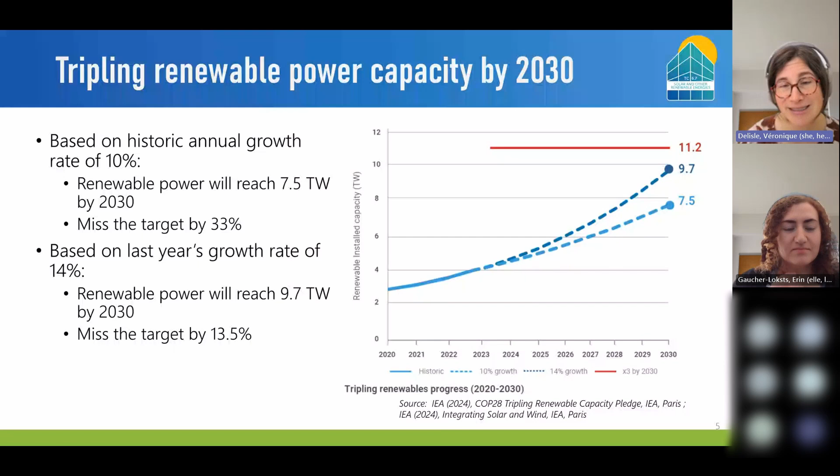Is this possible? Well, if we look at the historical annual growth rate of renewables, and again, that's all renewables, not only solar, not only wind, if we continue with the annual growth rate of 10%, we will reach 7.5 terawatts by 2030. So that's below our target of 11.2 by 33%. If we take last year's growth rate of 14%, we will reach 9.7 terawatts by 2030. So this is still below our target by 13.5%.

So solar is a subset of renewables. If we look at the bottom right graph, what we see here is the evolution of annual renewable energy installations. And what we see there is that in 2023, 75% of all renewable electricity capacity, okay, not energy, but capacity installation was PV, so photovoltaics.

What countries have the most PV systems? If we look on the bottom left, we see the theoretical PV penetration in 2023. So what is that? It's the theoretical percentage of the demand that PV production could provide. So it's energy here. In the European Union, 10% of the demand was theoretically met by PV in 2023. For the United States, it was 6%, and for Canada, 1.4%. If we look at the whole world, we're looking at 8% of the world electricity demand in 2023 that was supplied by PV, theoretically.

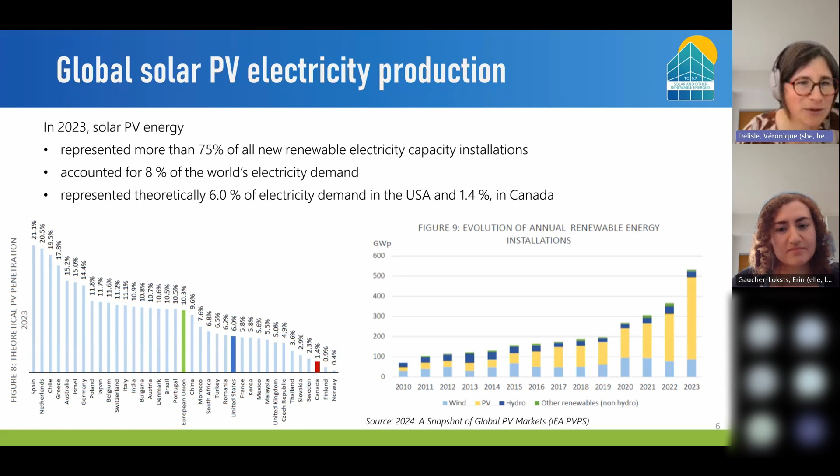What markets are the biggest in terms of solar PV? China was the biggest in 2023 with additional installation of 277 gigawatts. It represented 43% of the whole new installation in terms of capacity in 2023. That was followed by the European Union with 55.8 gigawatts and the USA with 30 gigawatts. And in 2023, the cumulative global solar PV capacity was in the order of 1,624 gigawatts. Also, 29 countries installed at least 1 gigawatt in 2023.

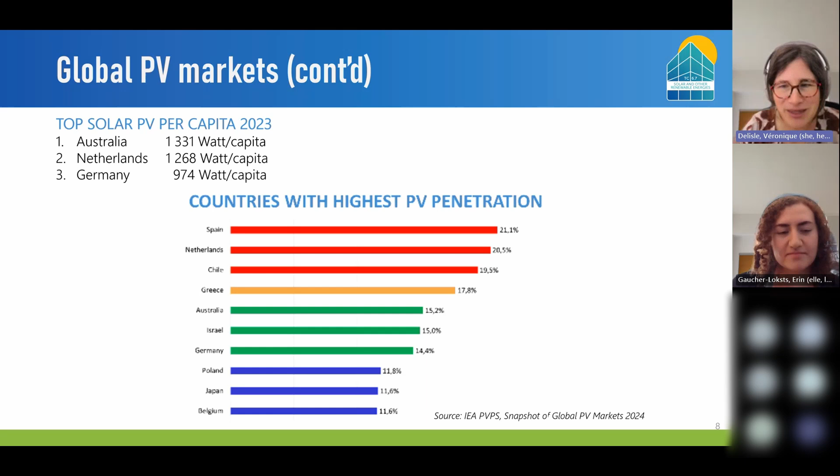If we continue looking at those global markets, what's interesting here is that there are 3 countries that have almost 20% of their demand met by PV: Spain, Netherlands, Chile. Then we have the group at 14 to 17% with Greece, Australia, Israel, and Germany. And then 3 countries in the 12% range, Poland, Japan, and Belgium. So we're going to need more PV. There's no doubt about that.

Where are those PV installations going to happen? So there's different types of PV installations. The one that you might be the most familiar with is ground-mounted PV systems that can be centralized. So centralized is when there is no consumption at the location of generation. So that's often utility scale PV systems. But you can also have ground-mounted systems that are distributed, meaning that there is consumption at the place of production.

So ground mounting is, of course, a large part of the current PV installations. But there are other types, agrivoltaics. So that's when you're combining PV production with agriculture. There are carport installations. There's infrastructure integrated PV. So that's when PV are used on roads, for example. And you will have floating PV as well. Floating PV is when PV modules are installed on a floating structure on reservoirs of hydro dams or water treatment plants. And then you have the building types of installations where you will find building applied systems.

So that's when modules are added to the buildings, applied to the buildings. And then you're going to have integrated systems. So when the BIPV system is fulfilling some of the functions of the building envelope. But we'll go a bit deeper later on what this means. But for now, let's look at the potential on buildings, and more specifically, the potential of rooftops. So the potential that the rooftop of buildings have for hosting PV.

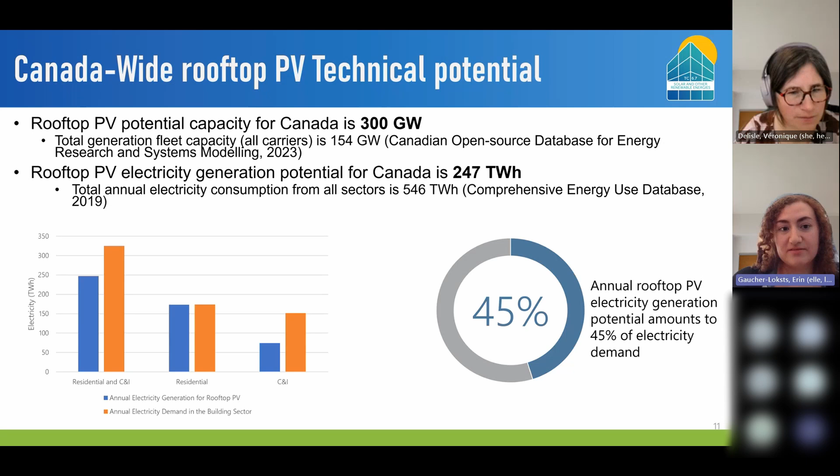And this was based on an analysis we did with 900 different scenarios with inputs of the PV cost, electricity cost, module specifications, maximum market share curves, which is based on payback, and also input parameters for our chosen model, which is the Bass diffusion model for market research and market evolution over time. So the result of that study is a range of annual electricity generation that is between 2 and 27% of the total electricity demand in Canada for 2050.

So the annual rooftop BAPV and BIPV electricity generation potential amounts to about an average of 6% of the total electricity demand based on the market potential analysis in Canada. And this is very much down from the previous slide, where we saw 45% with the technical potential.

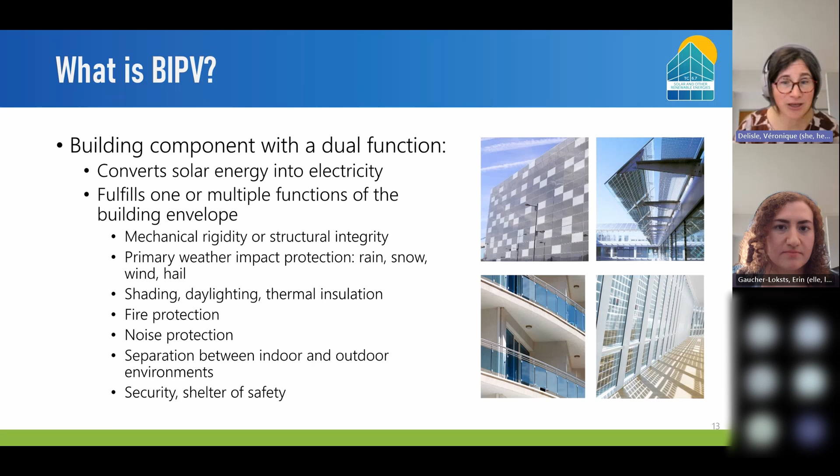So I touched upon it a bit earlier, but what is BIPV? It's when we have a component that not only converts solar energy into electricity, but also fulfills one or multiple functions of the building envelope. And what's a function of the building envelope? Well, it could be mechanical rigidity or structural integrity. It could be primary weather impact protection, shading, daylighting, thermal insulation, fire protection, noise protection. It could be separation between indoor and outdoor environments, like a semi-transparent PV window, security, shelter or safety, like a guardrail, which we see as an example here.

And how does BIPV compare to other types of installations? If we compare with ground-mounted PV systems, what's interesting with BIPV, which is also true for BAPV, is that it does not require surface area beyond that of the building footprint, right? The building already exists or is about to exist, and we're just using the existing surfaces. So that can be seen as interesting.

The other thing is if we compare with BAPV, building applied PV systems, and you will see examples later, it can definitely look nicer than building applied PV, so it can improve the aesthetics of the building. It's also two-in-one. BIPV is electricity production and building envelope function, so it can replace part of the costs associated with the building envelope. If I have PV cells in a window, I don't need a window in addition to that, right? It's two-in-one, so that's also a nice advantage.

And if I compare with traditional building envelope components, of course, a regular window or regular asphalt shingle component does not produce clean and renewable electricity like BIPV will. Of course, you can consume some of the electricity that you're producing, so you can reduce your building electricity costs. It can increase the flexibility of the building with respect to the electric grid, and if it's coupled with batteries, for example, or any kind of storage, it can increase the resilience of the building.

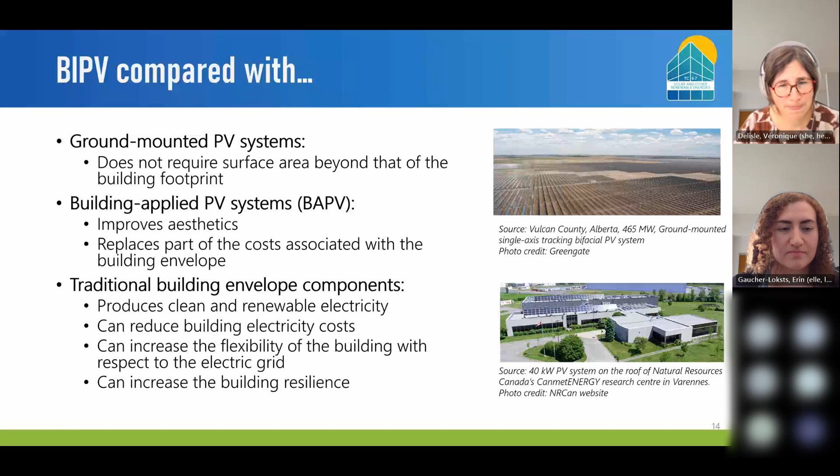If we're looking at cell technologies that we can find in BIPV, it's more or less the same ones that we can find in standard PV modules. Among the most common technologies that you will find is crystalline silicon. You can have monocrystalline, polycrystalline, bifacial. Bifacial is when the two sides of the PV cells are absorbing solar energy and converting it into electricity. Crystalline silicon cells are rigid and opaque, although you can play with the spacing between the cells to achieve different levels of transparency.

Efficiencies of crystalline silicon modules will be up to 22%, and they will be impacted by temperature. As the temperature increases, the efficiency will decrease at a rate of 0.5% per degree C. So it means if I have a 200 watt module at 25 degrees C, if this module is now at 50 degrees C, I will produce 175 watts. The lifespan of modules with crystalline silicon cells can be 25 years and more.

Then you have thin film technologies. Here, what we see is silicon-based, so you can have amorphous silicon technology there. The interesting thing with thin films is you can deposit them on rigid or flexible substrates, so that's giving some possibilities. And you can also play with the thickness of the deposition layer, and with that thickness, you can achieve different levels of transparency. So with crystallines, you will space the cells to have transparency. In the case of thin film, you would just deposit less.

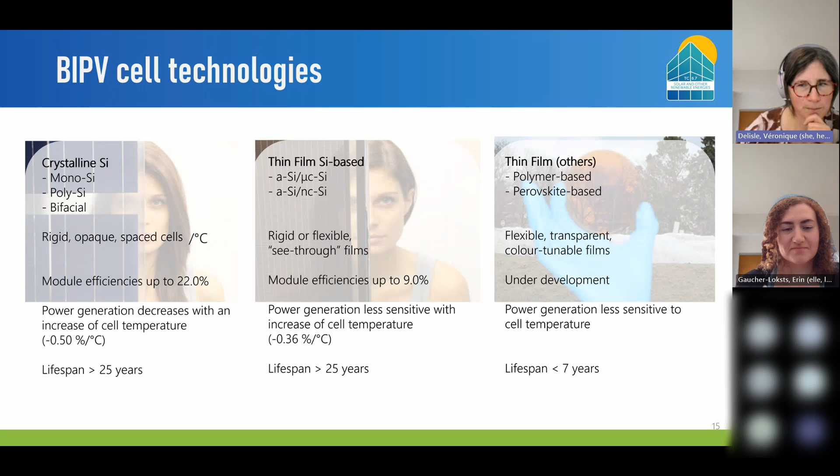Which brings us, yeah. Go for it. Sorry, I was on mute.

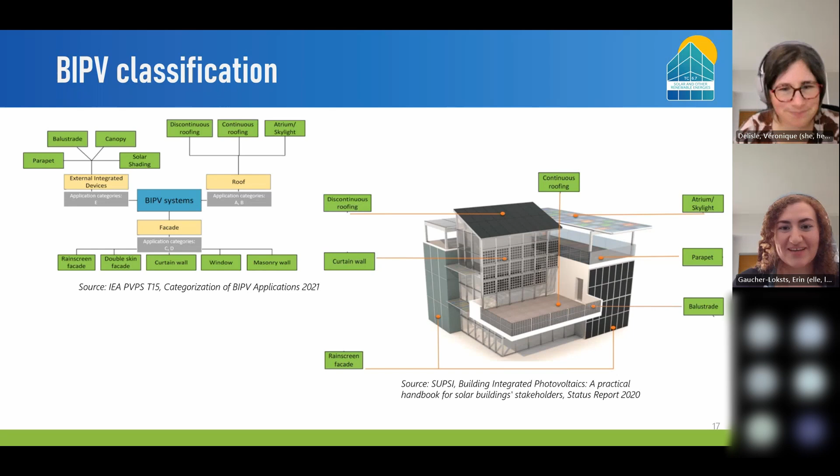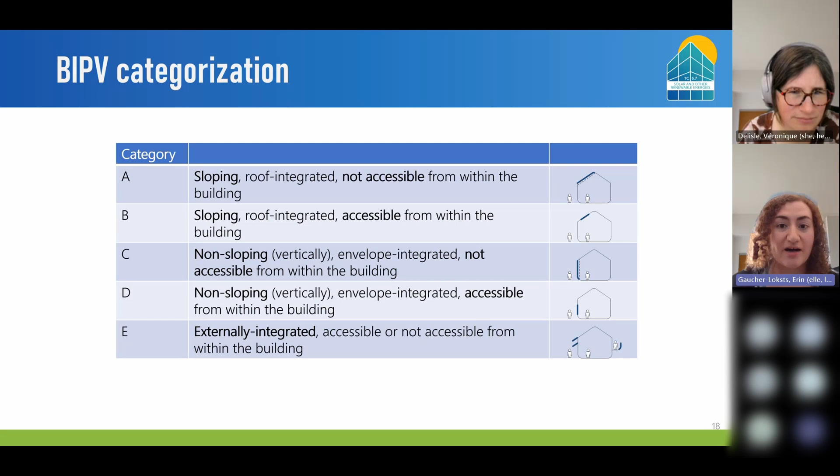So I mentioned that there are three different areas where you can place BIPV, your roof, facade, and externally integrated, but these could be further divided into 5 different categories. Category A and B are for roof applications, with category A inaccessible from the inside, and category B accessible from the inside, so you can touch the module from the inside. Category C and D are facade applications, where category C is inaccessible from the inside. So this could be a rain screen facade that is only outside of your building. And category D is accessible from the inside, so this can be a window that can be touched from inside. Category E is externally integrated systems that can be accessible or not from the inside. This would be solar shading, balconies, or similar applications.

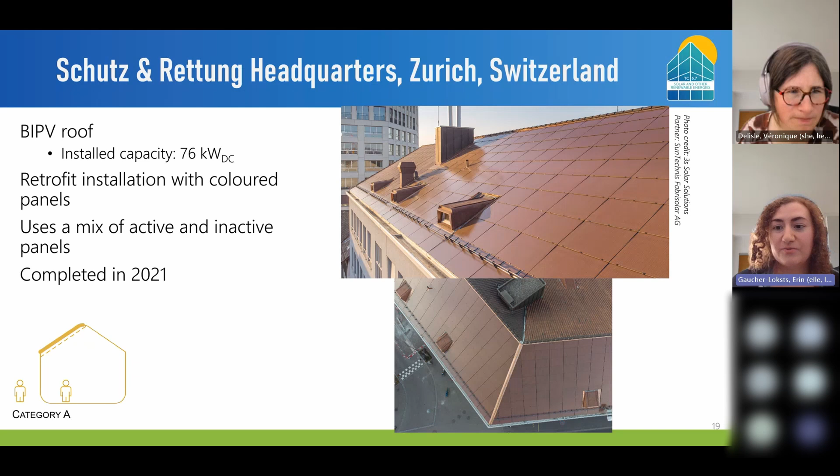Thank you. To give an example of these categories, we have a few case studies to show for each different category. So in category A, for a rooftop installation that is not accessible from the inside, we have a headquarters in Switzerland with an installed capacity of 76 kilowatts. This installation was a retrofit completed in 2021, which used a mix of active and inactive colored panels. And the coloring was custom made for this installation. Next slide.

So this installation is an atrium for a building at the University of Alberta in Canada. It was completed in 2018 with an installed capacity of 10 kilowatts. This used custom-made semi-transparent panels with opaque cells distributed in a unique pattern over the atrium. So they had a different design, and they custom-made those panels so that they can have a unique design across the atrium with semi-transparent cells.

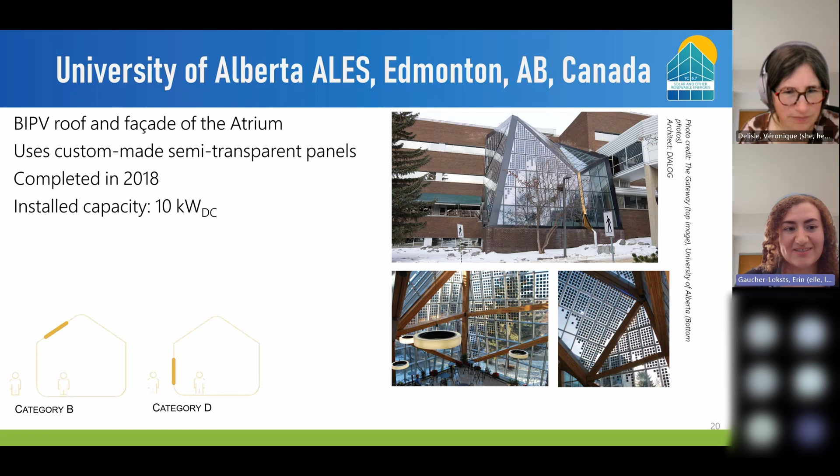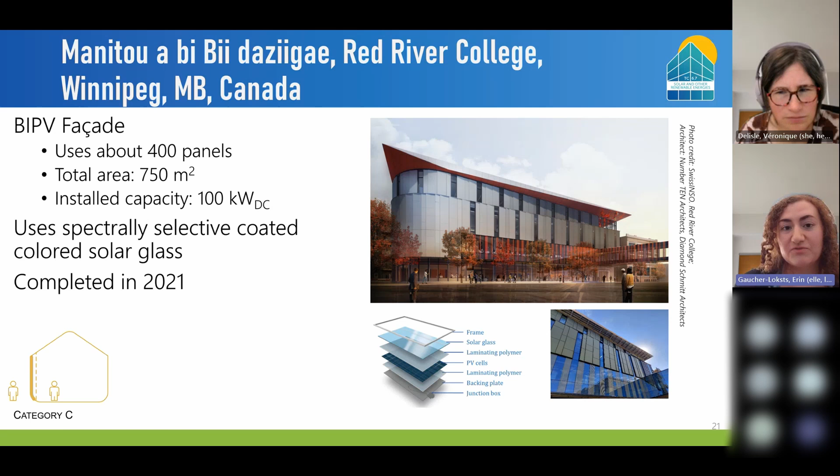Yes. So the next building is for the Red River College in Winnipeg, in Canada. They installed a BIPV facade on one of their buildings. It was constructed in 2021 with an installed capacity of 100 kilowatts. This building used BIPV modules that were a bit more unique, with spectrally selective coated colored solar glass instead of using pigments or dyes, so the color will not fade with the passage of time or due to any sun exposure. Next slide, please.

So this is a recent installation at Saint Mary's University in Halifax, Canada. This is a retrofit installation with an opaque facade as well as semi-transparent windows, and it was completed earlier this year in 2024. This is the tallest BIPV installation in Canada, with 22 stories of BIPV. It had a total installed capacity of 100 kilowatts. Next slide, please.

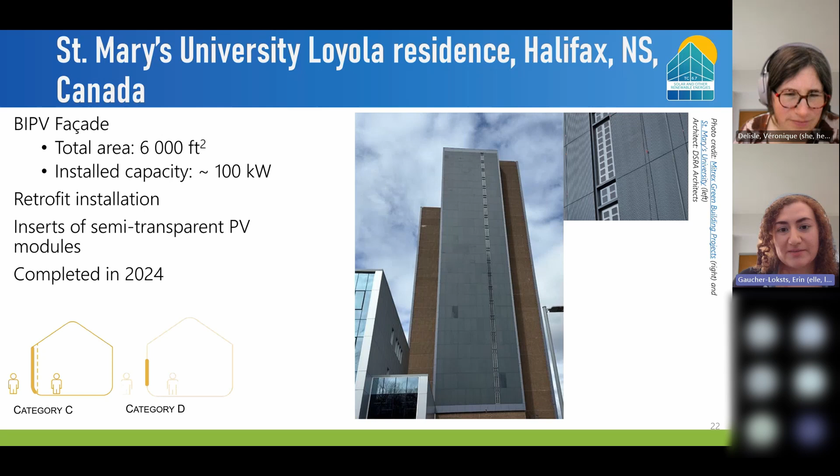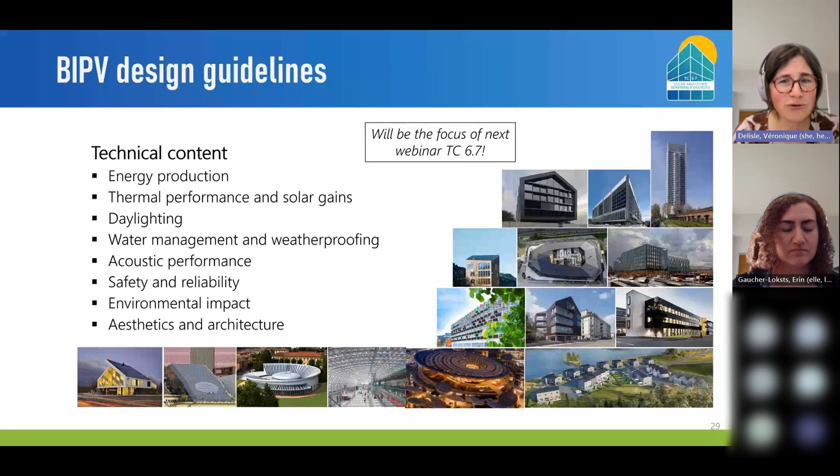And this guideline contains information on what to consider when you're designing a BIPV system with respect to energy production, thermal performance and solar gains, daylighting, water management and weatherproofing, acoustic performance, safety and reliability, environmental impact, aesthetics and architecture. And you can see there a number of projects all around the world that were used to develop the content for that guideline.

So let me touch now on standards and codes when it comes to BIPV and explain why it's such a challenge. So on this picture, what we have is a facade that's divided in three parts, right? So the upper part is a BIPV window. In the middle, we have a BIPV solar protection system. And at the bottom, we have a BIPV facade that is opaque.

So all parts, of course, produce electricity, right? That's a given. They also impact the heating, ventilation, and air conditioning load. They impact the occupant comfort, obviously, because they have an impact either on lighting or the temperature inside the building.

If we're looking at the BIPV window and the BIPV facade, well, they also impact the hygrothermal performance of the building. And if we consider the BIPV window and the BIPV solar protection system, well, they have an impact on the amount of daylighting that will come in, and consequently, the amount of electricity consumption that's going to be dedicated to artificial lighting.

So it becomes very evident with this that BIPV systems impact the buildings. And of course, they serve one or multiple functions of the building envelope, so it has an impact on the building. So when it comes to BIPV, it must comply with codes and standards for both the PV, but also the buildings.

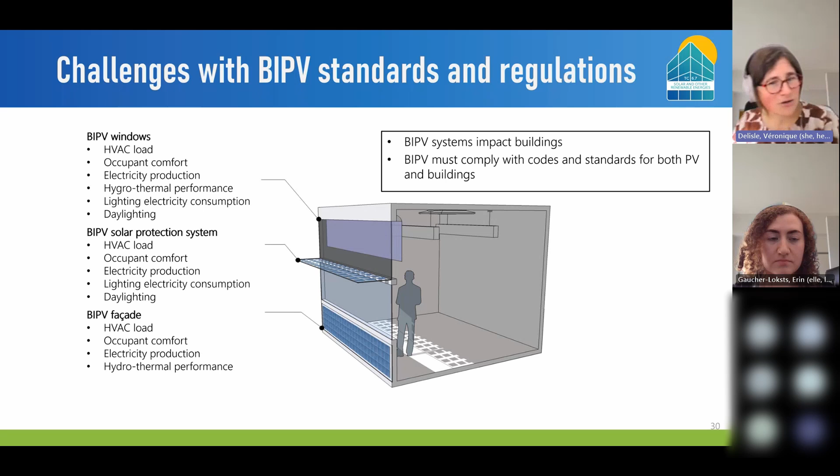So where are we on standards? So I'll just tell you a bit of the story here: one of the first, if not the first, standards on BIPV came from the European group, so EN. That was in 2016. It was a two-part standard, part one on BIPV modules, part two on BIPV systems, explaining basically the different requirements.

That inspired the IEC, so International Electrotechnical Commission, to develop an international standard on BIPV. That was also -1 for modules, -2 for systems. So that was in 2020. Recently in Canada, we adopted actually, with deviations, the IEC 63092 standard. So that became, with deviations again, the CSA standard, so a Canadian version of the standard. And so that's a little bit the story.

And right now they are revising the EN standards. You can imagine that this will eventually influence the IEC revision and of course the Canadian revision. In parallel, there is an IEC and ISO joint working group on BIPV, joint working group 11. And this working group assumes responsibility for ISO TS 18178, so glass in building, laminated solar PV glass for use in buildings, and the IEC 63092 series, which touches on PV.

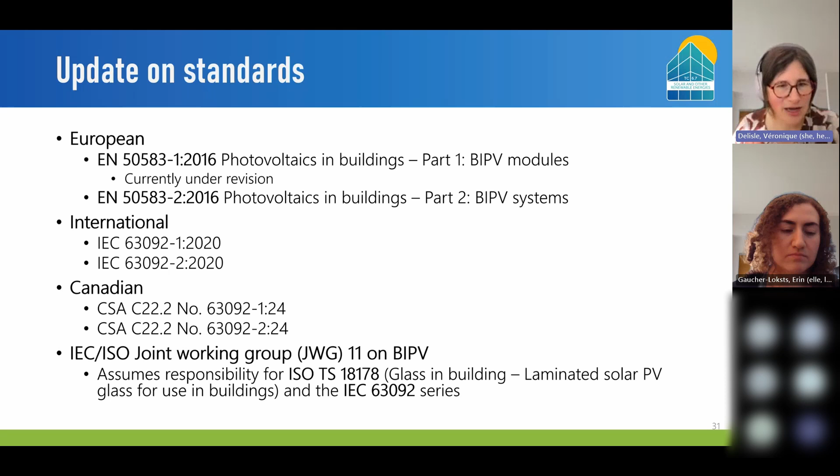So this joint working group was put together so they can develop specific aspects of BIPV standards that touch, again, the electricity part, but also the building part, and in this case specifically when it has glass, right? Because it's the ISO TS 18178, which is glass in building. So since they're all inspired from one another, I'll focus on the IEC, the international one.

So what does it contain? It contains electrotechnical requirements, as well as building-related requirements, and those requirements vary according to the presence of glass panes. So there are aspects related to mechanical resistance and durability, safety in case of fire, hygiene, health and environment, safety and accessibility in use, protection against noise, energy economy and heat retention, as well as sustainable use of natural resources.

And in those standards, when it comes to the building-related requirements, there's a lot of, well, for your building-related requirements, read your national, regional, and local building code requirements, right? So it helps, but it's still like, okay, I still have to look at everything that is related on the building side.

And the other challenge is that those specific building requirements were not necessarily developed for building components that were going to produce electricity, right? So if you're just looking at the safety in case of fire and you point to your building code, your building code says, okay, well, if you have a roof, it has to do this, this, and this.